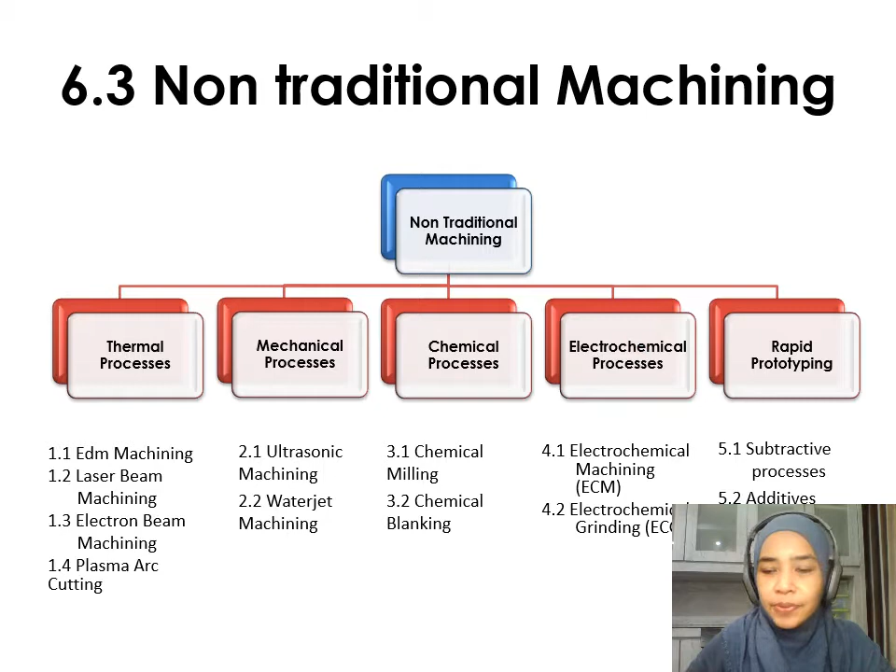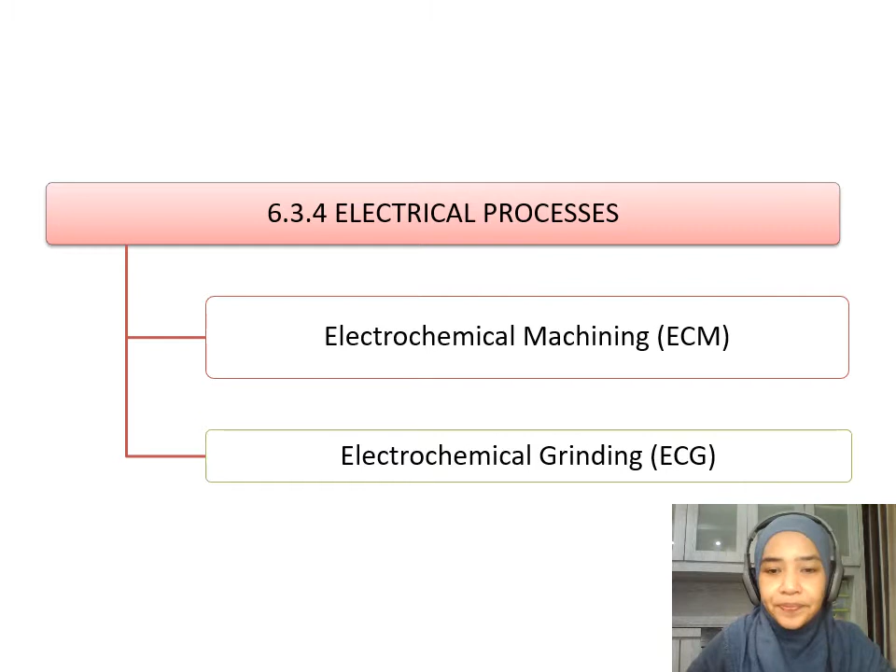So here is the learning objective of the electrical processes. We're gonna discuss about electrochemical machining (ECM) and also electrochemical grinding (ECG). So what is ECM? What is electrochemical process ni?

Electrochemical process merupakan satu proses yang akan melibatkan electrolytic reaction at the workpiece surface yang bertanggungjawab untuk remove the material. Dua metod yang biasa adalah electrochemical machining and electrochemical grinding.

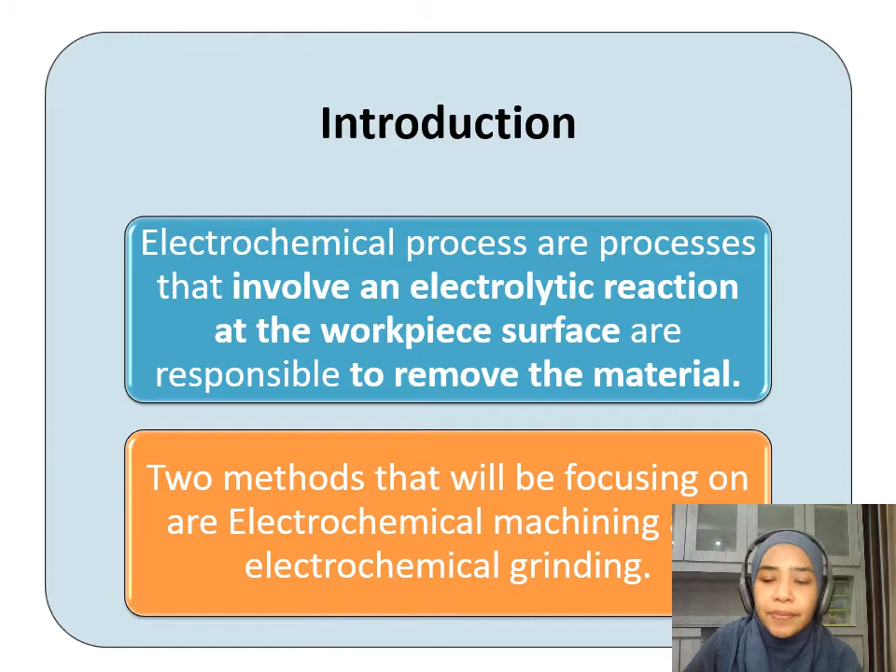So obviously kalau kita tengok dari segi electrochemical ni, dia akan menggunakan electroplating punya reverse lah. So ECM remove metal from the electrically conductive material ataupun conductive workpiece. So syarat dia mesti workpiece yang hendak dipotong itu bersifat konduktif, pengalir. Dan bagaimana workpiece tadi dapat disingkirkan by the anodic dissolution with rapidly flowing electrolyte.

So dia menggunakan electrolyte sekali. Kita akan tengok bagaimana combination of the workpiece dan electrolyte tadi berfungsi dalam menyingkirkan material. Electrolyte pula bertindak sebagai current carrier, sama seperti EDM tadi, di mana kita ada dielectric fluid yang digunakan sebagai pelengkap litar. And the high rate of the electrolyte movement in the tool workpiece gap washes metal ions from the workpiece.

Workpiece kita bersifat anode, okay, positif. Meanwhile kita punya tool bersifat cathode, negatif.

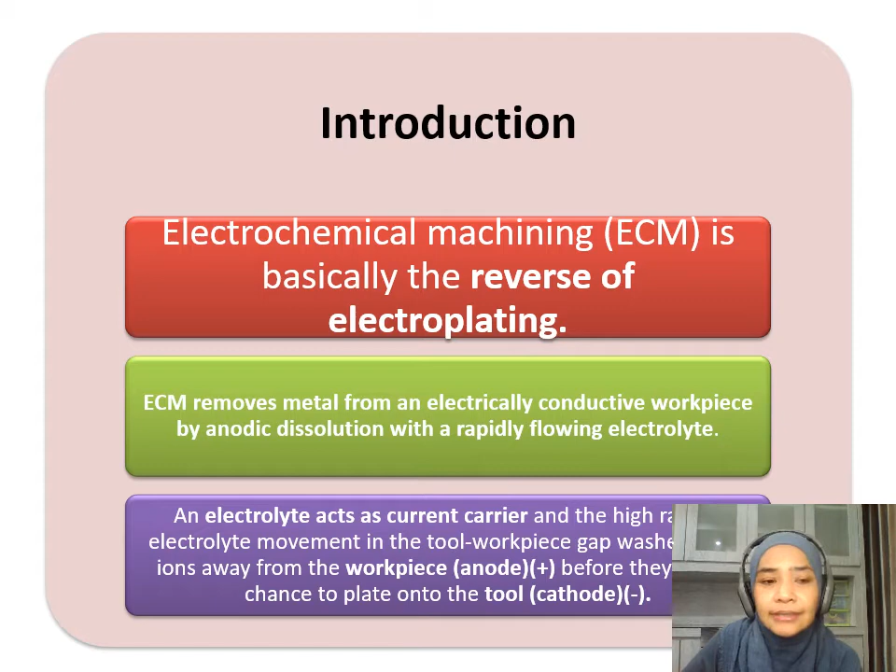From here, you can see the principle of operation. This is the bahagian kita nak potong. The workpiece is over here, dan kalau kita tengok yang warna hitam ni, the black color is kita punya insulation. And this is a tool, yang berada atas insulator ni adalah tool kita, which is cathode bersifat negatif, ion negatif. Dan kita punya workpiece ni adalah anode bersifat positif, ion positif.

So at the same time, look at here. The part over here and the filter, this is the electrolyte yang akan mengalir. Kalau kita tengok kat sini, obviously the electrolyte ini yang mengalir between the gap over here, gap between the tool and the workpiece, bertindak sebagai pelengkap kepada litar yang ada dalam sistem electrochemical machining ni.

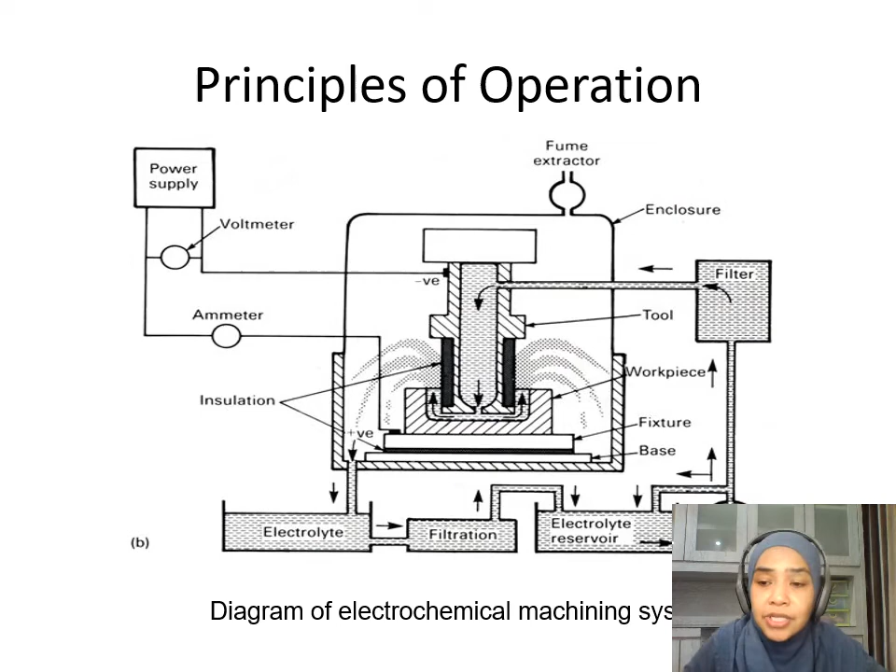So kalau tengok kat sini, the electrolyte yang terkumpul ni masuk sini, akan mengalami filtration. Lepas filter, dia masuk dalam reservoir, tangki dia, sebelum di pump masuk ke dalam filter untuk masuk semula kepada kawasan pemotongan. This is how the cycle of the electrolyte dalam sistem electrochemical machining ni berfungsi.

Dari segi gambar macam ini pula, lebih kepada focusing on the machining area. Warna hijau ni kita punya workpiece, meanwhile warna kuning ini is kita punya tool, bersifat negatif, cathode.

Sebab kita tak nak tool kita haus, kita letak insulator, supaya kawasan sini tidak akan ada direct contact dengan tool kat sini. Sebab kalau yang ni open, dia akan makan potong kat sini juga, dan bentuknya akan lari. Jadi kita letak insulator untuk kita block dia potong bahagian yang tidak sepatutnya.

Warna biru ni adalah electrolyte kita, as a current carrier, also pelengkap kepada litar yang ada dekat sini. Over here you can see the electrolyte flow and return back to the machine, keluar mengalir kat sini, and from the filter masuk balik, pump masuk balik ke sini.

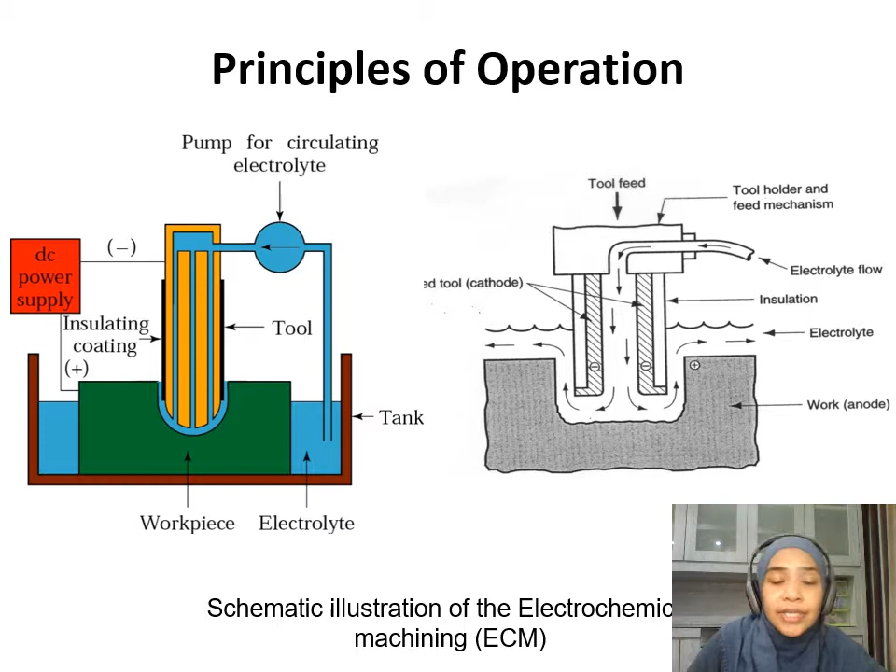Okay, so actually apa yang berlaku sebenarnya ni? Ni adalah example of the combination of tool and the workpiece. Sebenarnya bentuk pemotongan, shape yang akan terhasil pada workpiece kita adalah mengikut kepada shape of cathode tool kita. Cathode tool bentuk ni, bentuk macam gini, so shape yang akan dipotong macam gini juga.

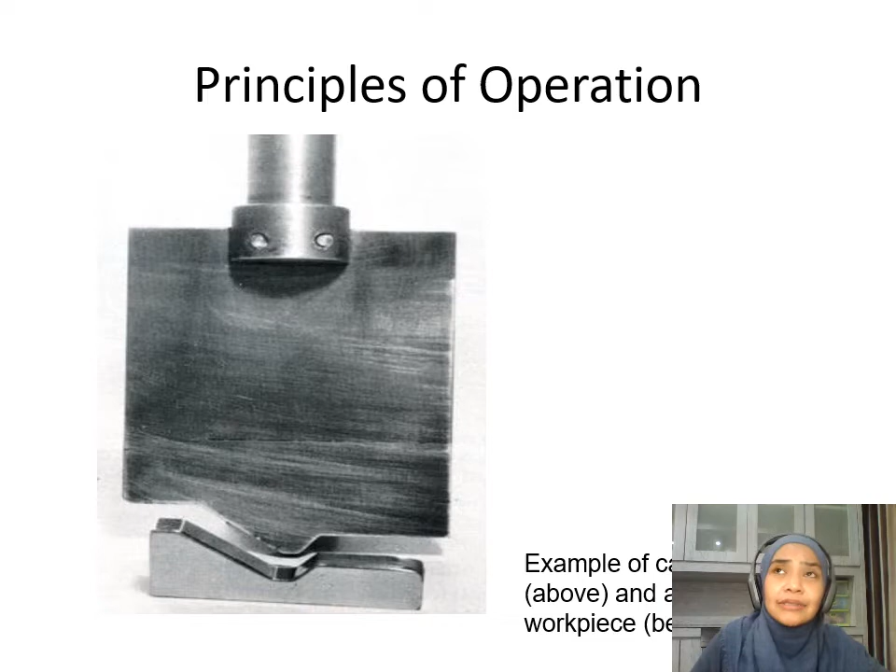So actually workpiece kita akan replicate exactly apa yang ada pada tool kita. Tak kisahlah dalam USM ke, dalam die-sinking EDM ke, dalam electrochemical machining pun macam itu juga. So the principle underlying the process is that the material depletes keluar from the anode and deposited onto the cathode, dia akan melekat pada cathode kita.

In the presence of the electrolyte bath. The difference in ECM is that the electrolyte bath flow rapidly between the pole, antara ion positive and ion negative tadi. Ion positive adalah workpiece kita, ion negative adalah tool kita. Jadi dia tak sempat melekat pada tool kita.

Jadi instead of material tadi, dalam electroplating bahagian positif dia disingkir keluar, so dia akan melekat pada bahagian negatif ni, I mean bahagian cathode. Biasanya dalam electroplating punya konsep ni, material yang disingkirkan daripada workpiece akan melekat pada cathode, which is kita punya electrode.

Tetapi because of the flow of the electrolyte bath ini sangat laju, dia tak sempat nak melekat. Maksudnya material disingkirkan daripada workpiece, sepatutnya melekat pada cathode tadi, tapi tidak melekat disebabkan oleh stream of the electrolyte. So dia akan carry off the material sebelum dia sempat melekat pada cathode, which is kita punya tool.

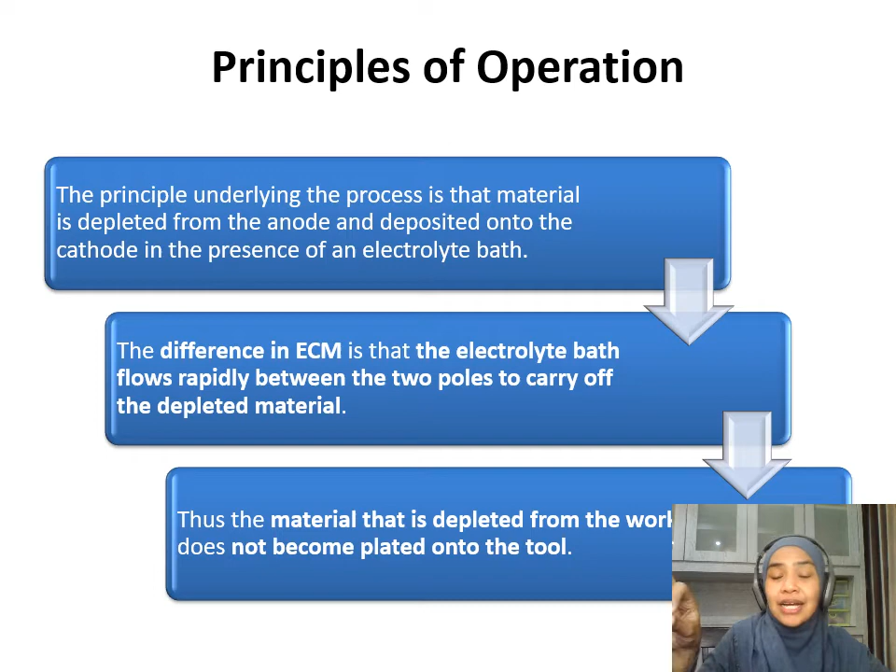Thus the material that is depleted from the workpiece does not become plated. Maksudnya dia yang sepatutnya selepas disingkir keluar daripada workpiece patutnya melekat pada cathode, tetapi because of the stream of the electrolyte tadi menyebabkan dia tak sempat melekat, dan akhirnya disingkirkan daripada kawasan pemesinan. Kalau tak, nanti tool awak akan jadi semakin besar because of the plated material yang depleted from the workpiece.

Biasanya electrolyte ni bersifat konduktif, inorganic solution seperti sodium chloride yang dicampur dengan air atau sodium nitrate. It was pumped dekat laluan di antara tool and the workpiece tadi dengan high rate. And also electrolyte akan bertindak sebagai current carrier, pembawa arus.

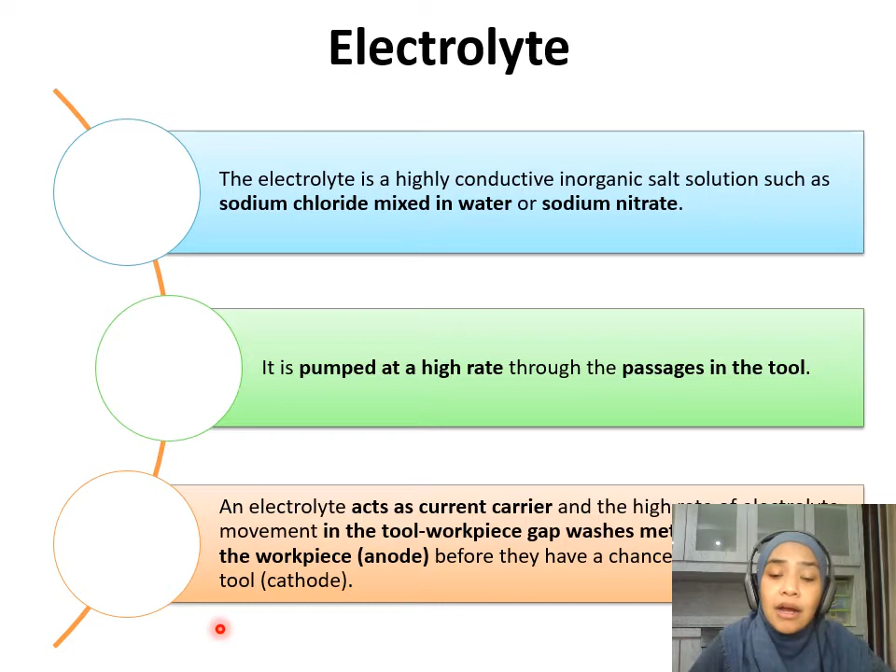The high rate of the electrolyte movement, pergerakan yang sangat laju tadi, akan wash away ions sebelum dia sempat plated pada tool, ataupun cathode.

So the function of electrolyte, selain daripada carries away the heat, carries away the ions, remove products from the reaction before plated on the tool, it's help the machine reaction necessary for the anodic dissolution to take place, and complete the electrical circuit. That was the function of the electrolyte in the electrochemical machining.

And required characteristic, ciri-ciri yang perlu ada pada electrolyte: high electrical conductor to reduce the power loss, machine at a high current efficiency for good surface finish, non-toxic and safe for use, and non-corrosive.

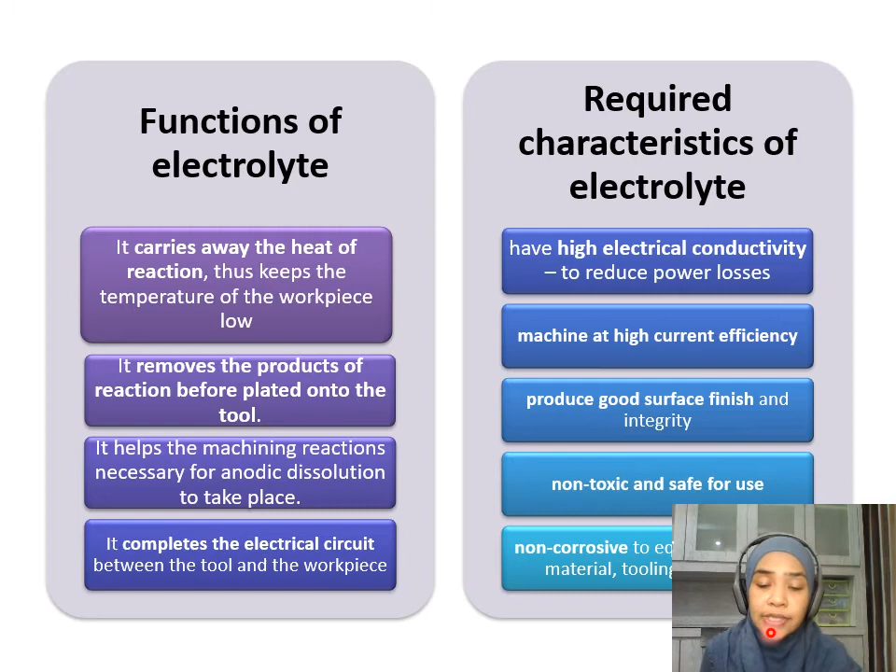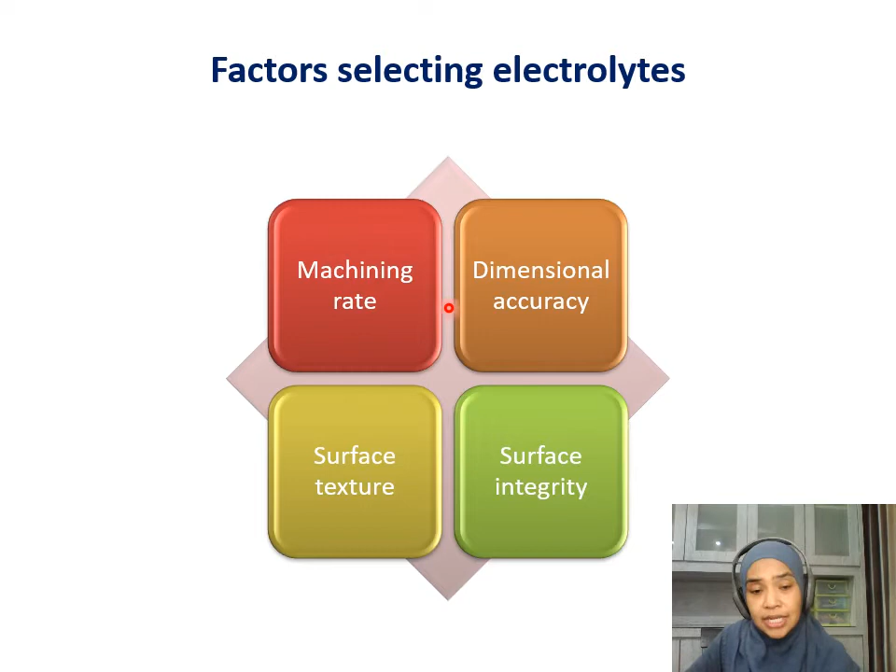The factors need to be considered while selecting the electrolyte adalah machining rate, dimensional accuracy, surface texture and surface integrity. So this is dari segi required characteristic of electrolyte.

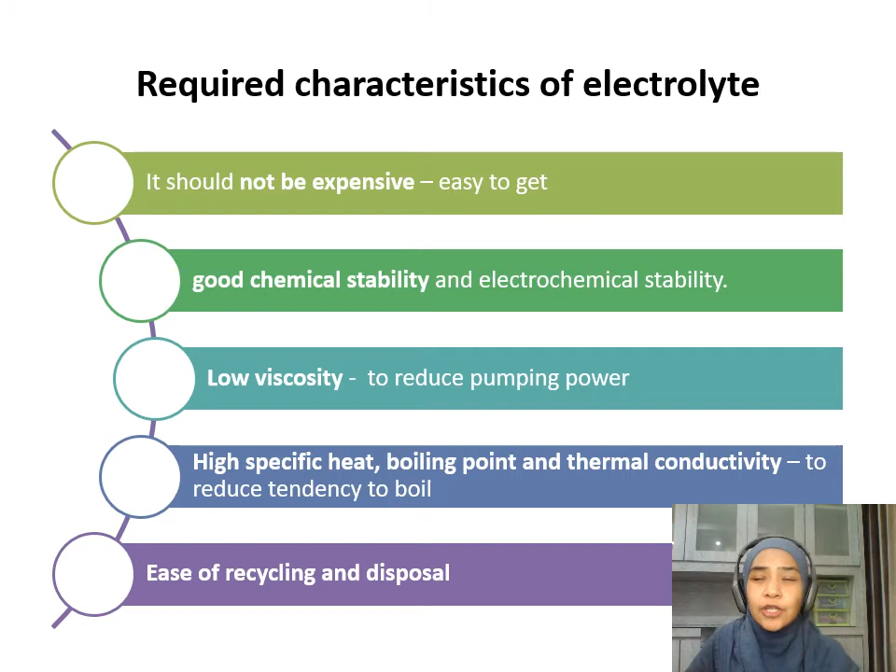It should not be expensive, easy to get, good chemical stability dan electrochemical stability, low viscosity, tak pekat sangat, sehingga menyusahkan pumping of power tu. So high specific heat, boiling point and thermal conductivity will reduce the tendency to boil, ease of recycling and disposal - senang untuk dilupuskan, senang juga untuk di-recycle.

Dalam kita ambil tool pula as cathode, negatif, so dia mestilah bersifat konduktif and resistant. Senang untuk kita machine because the tool is important untuk kita replicate, maksudnya bentuk yang kita nak hasilkan pada workpiece. Kalau tool tadi susah untuk machine, nanti hasil kerja pada workpiece pun tak cantik, sebab workpiece kita akan replicate exactly bentuk tool kita.

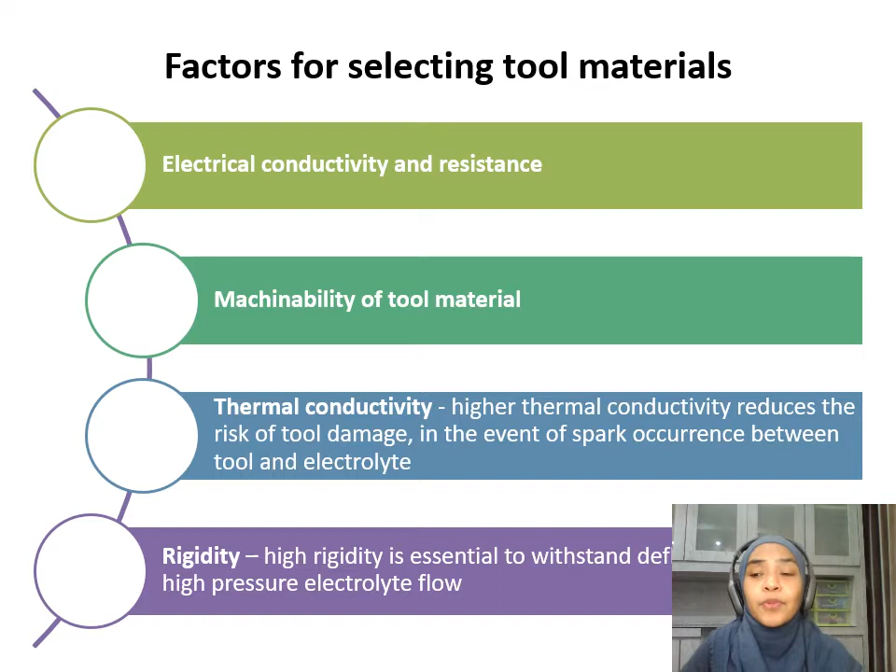Thermal conductivity - higher conductivity reduce the risk of tool damage in the event of spark occurrence between the tool and the electrolyte. Rigidity, dia kuat, dia kukuh - high rigidity is essential to withstand the deflection due to the high pressure electrolyte flow. Bila dia ada aliran yang sangat tinggi, dia tak mau benda tu boleh bergerak, sebab bila dia deflect, dia akan mengganggu bentuk yang bakal dihasilkan kepada workpiece nanti.

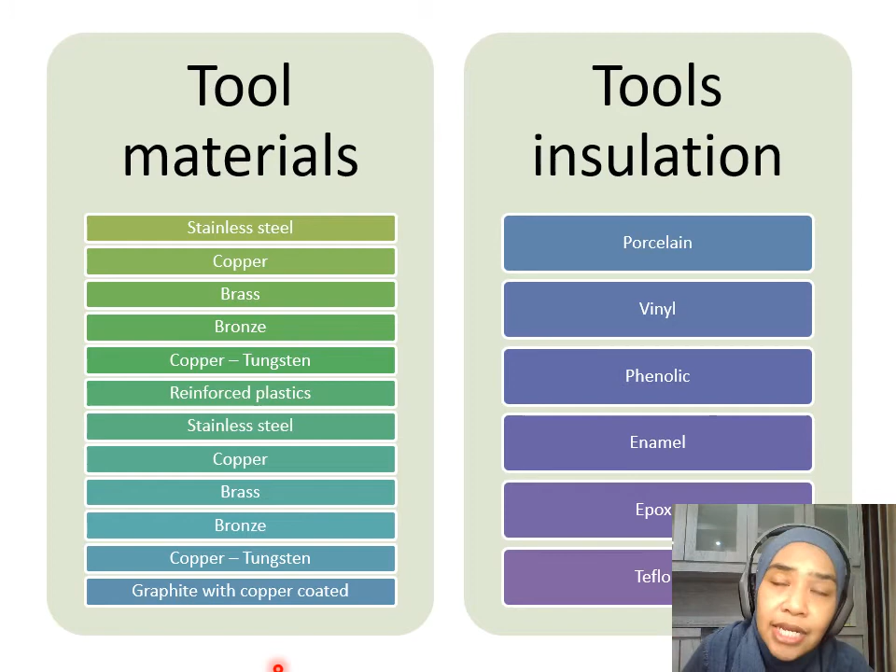Dari segi material to material, this is the list of the tool materials can be machined using the electrochemical machining. This is the insulator yang boleh digunakan untuk cover tool, cover cathode - porcelain, vinyl, phenolic, enamel, epoxy, teflon. So mostly daripada ceramik dan juga polymer.

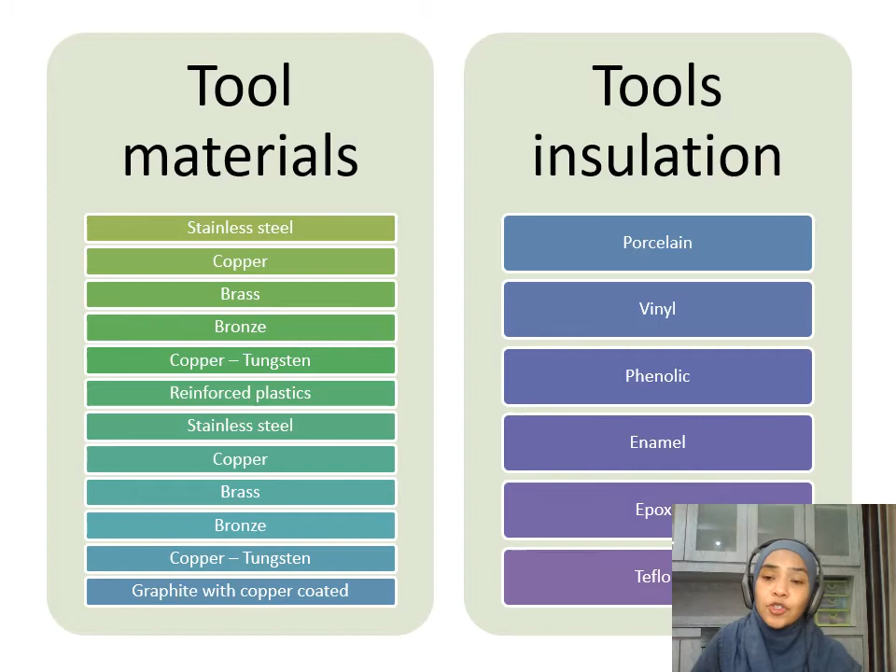Dari segi tool feed, because the tool does not wear in the ECM, so a servo controller is not required to maintain a certain gap - tak perlu sampai too critical untuk memastikan gap tu terlampau crucial. However, the tool needs to be fed at a constant rate. Walaupun tidak perlu dikawal terlalu crucial, kita perlu pastikan constant rate, otherwise the gap distance will be increased. Kalau kita biar dia bertambah, pembersihan tu mungkin akan terganggu. And the feed rate juga bergantung kepada sejauh mana pembersihan yang berlaku pada ketika itu.

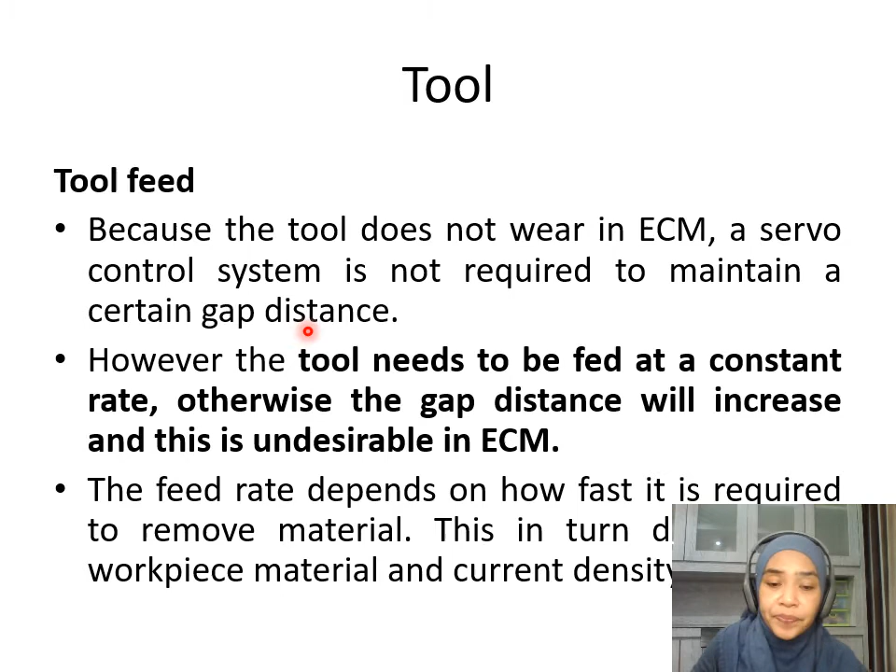Feed rate is very slow, is very low but needs to be very smooth. Okay, tak boleh laju. Okay, but somehow smooth, tak boleh dijerking dan sebagainya. The sliding movement of tool can be controlled using the hydraulic cylinder which allow unlimited choice of the feed rate.

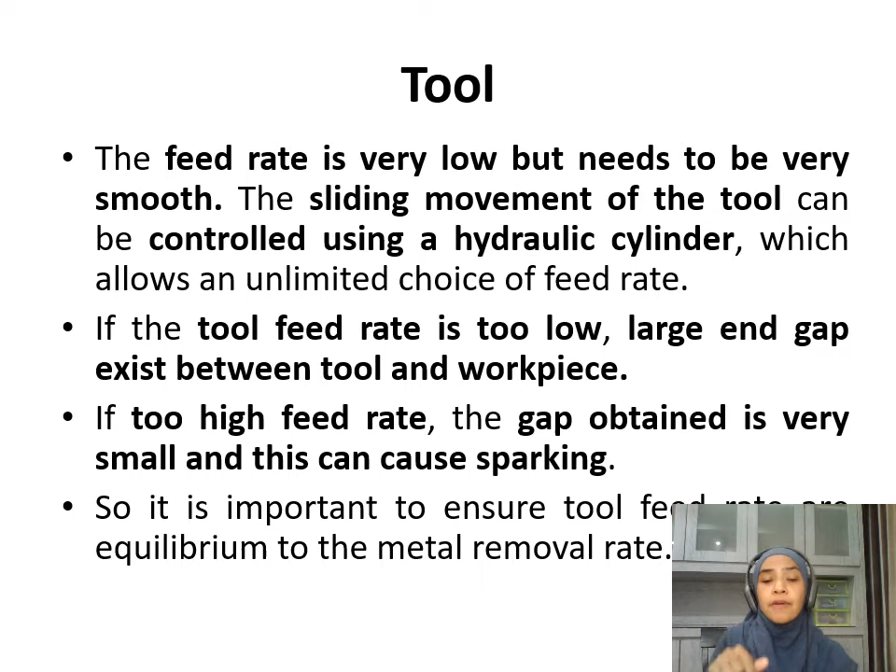So it's important to make sure that the feed rate of the tool tu berlaku pada keadaan yang seimbang dengan kita punya MRR ataupun material removal rate. And biasanya kecacatan yang berlaku dalam ECM ni adalah cavitation. Cavity ni macam kita kata lubang-lubang lah, yang terhasil berlakunya tool damage, surface finish, irregular work surface, striation.

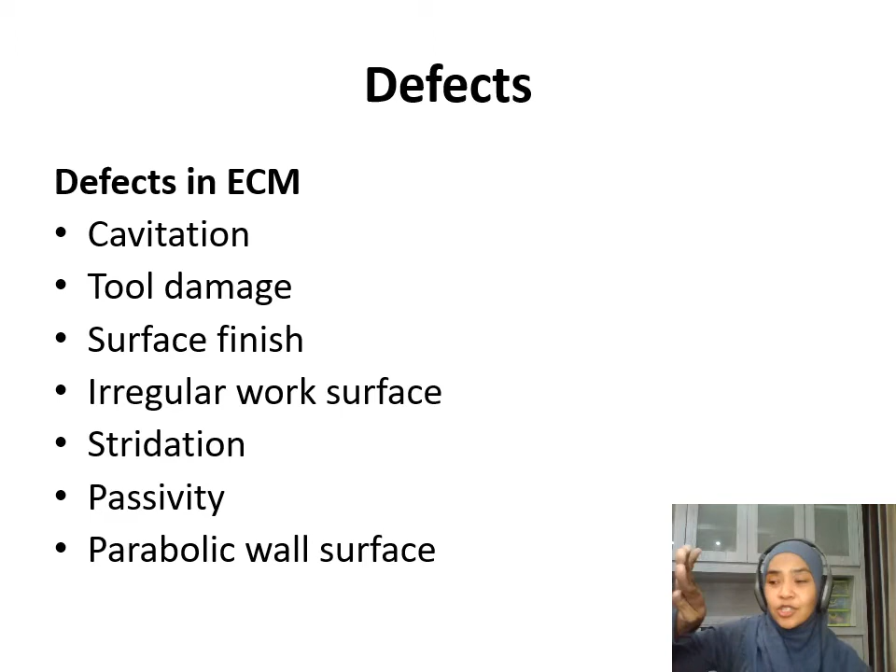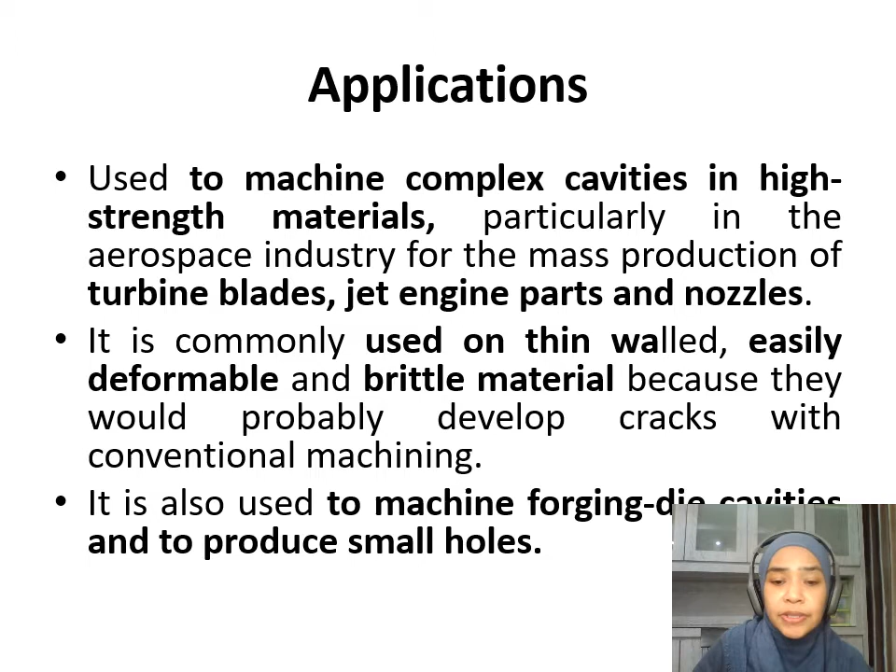Dari segi application, used to machine complex cavity in high strength material, such as in the turbine blades, engine parts and nozzle, used in the thin wall, easily deformable and brittle material, and to machine forging die cavities and produce small hole. This is the example of the product from the electrochemical machining.

Dari segi kelebihan dia, look at here, machine efficiently, complicated configuration can be obtained. Actually saya boleh conclude dalam semua part machined by the NTM, non-traditional machine, it can machine complicated configurations. I mean that complicated, complex ataupun intricate shape. Tak ada masalah, sebab tu dia diwujudkan. Apa yang tak boleh di machine dekat kita punya machining can be machined here.

There is no tool wear. There is no thermal damage. The residual compressive stress is very small. Can carry out finishing machining operation. A satisfactory level of surface roughness can be obtained. Maksudnya dari segi dia punya roughness tu acceptable lah, memuaskan lah.

Namun dari segi disadvantages atau limitation of this process is only metal, because they need to be conductive metal. And also require energy consumption yang tinggi. Surface finish not very fine, acceptable tapi taklah terlampau halus. MRR dia, material removal dia agak perlahan. Boleh menyebabkan karat di kemudian hari nanti. Corrosion of the part is serious drawback.

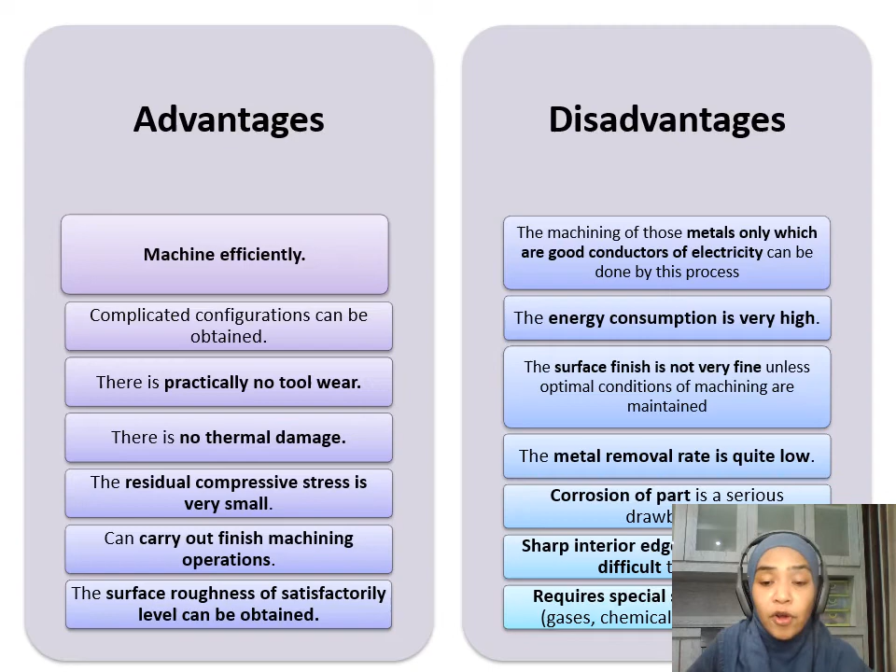Sharp interior edge and corner are difficult to make, and also kita kena ada safety provisions such as gases, chemical and high current, because it involves all the gases, chemical and high current. This is the list of the question can be answered. You can test yourself by answering the question.

Next, we're going to discuss about the electrochemical grinding. So yang membezakan electrochemical grinding and electrochemical machining adalah use abrasive particle. Grinding carbides and high strength temperature resistant, HSTR alloys, hard to machine alloys, etc. with the diamond wheel is very costly because of the high cost of the abrasive.

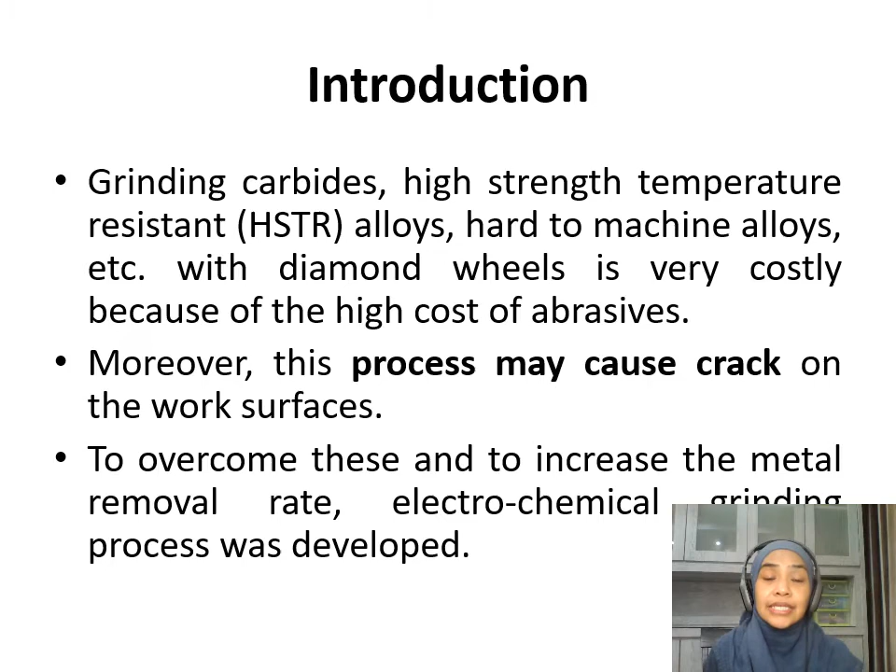In the electrochemical grinding process atau ECG is actually the improvised version of the ECM tadi. So ECM tak guna abrasive particle, yang ni dia guna abrasive particle, dalam bentuk conventional grinding lah. The equipment used is similar to the conventional grinder. So kita ada grinder wheel over there.

Cuma kalau dalam abrasive machining, the grinder wheel tu akan touch kita punya workpiece. This one is not touched at all. There is no touching at all between the wheel and the workpiece. The wheel is metal bonded. Kita ada vitrified, metal, resinoid. So kita guna metal bonded with the diamond or aluminium oxide.

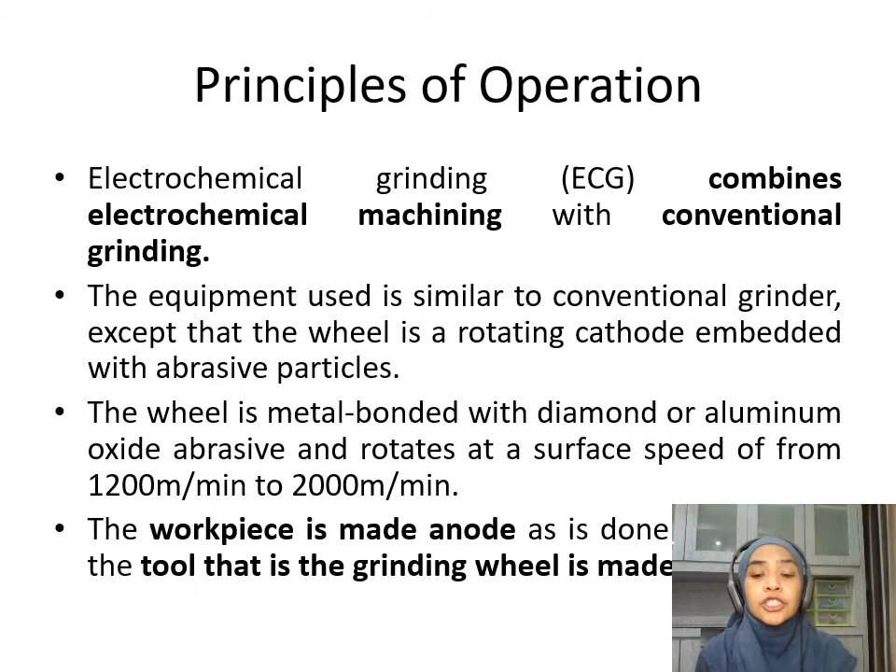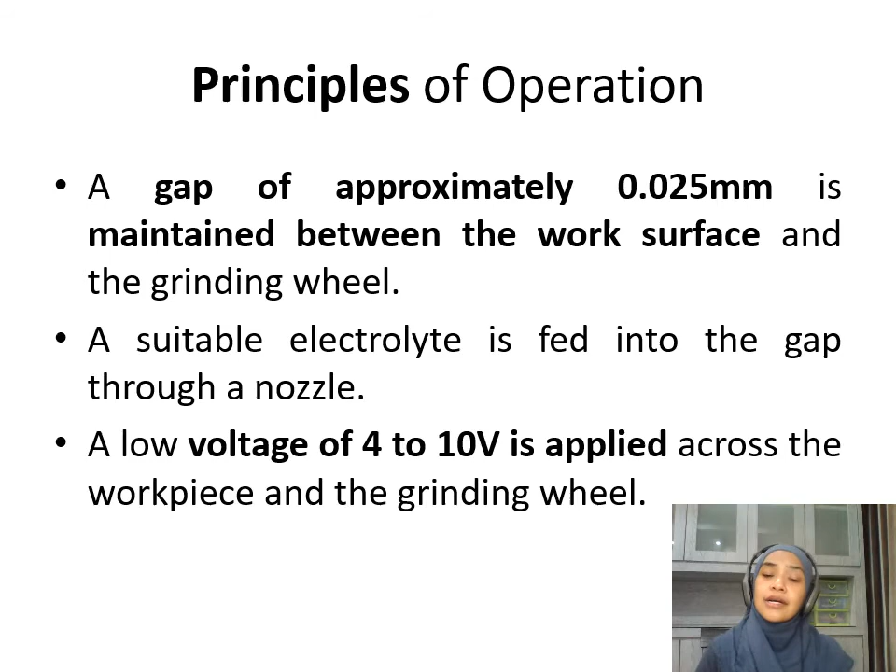And rotate pada speed 1200 meter per minute hingga 2000 meter per minute. Workpiece as anode, maksudnya positif. Meanwhile the tool, kita punya grinder as a cathode. Dari segi gap, we maintain about 0.025 mm between the anode and the cathode. Electrolyte will be fed into the gap, and the voltage applied daripada 4 hingga 10 volts.

As a principle of operation, high density current passes to the electrode. The abrasive particles of the grinding wheel are non-conductors of electricity. Therefore, they are bonded among themselves and to the wheel metallically to help complete the electrical circuit.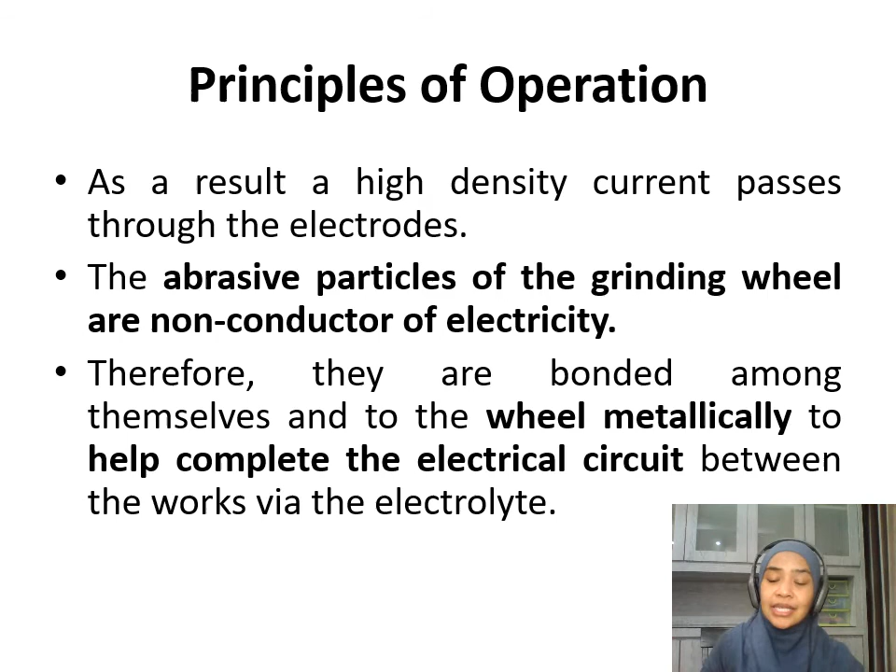Okay, so over here the whole system forms an electrolytic cell. Electrolytic dissolution of the work material takes place and material removal from the workpiece is effected. Material removal happens in two ways. One is by anodic dissolution, because it is electrochemical, so the material of the workpiece, which acts as the anode, is removed.

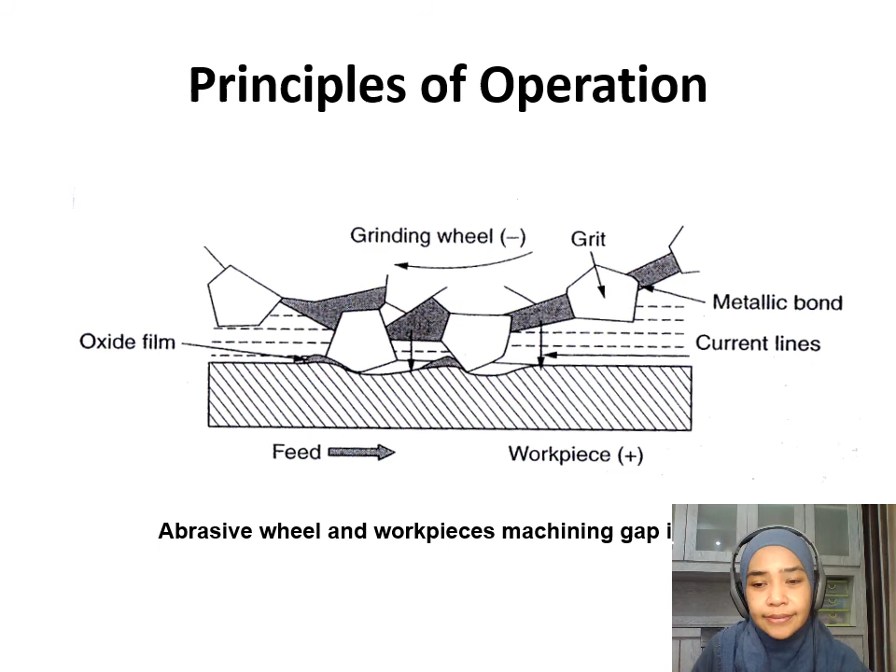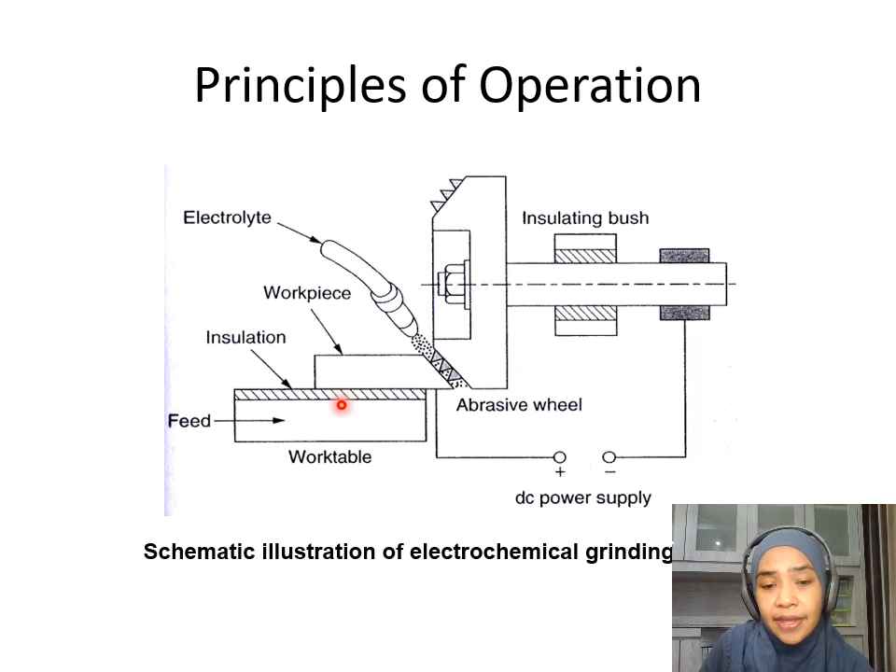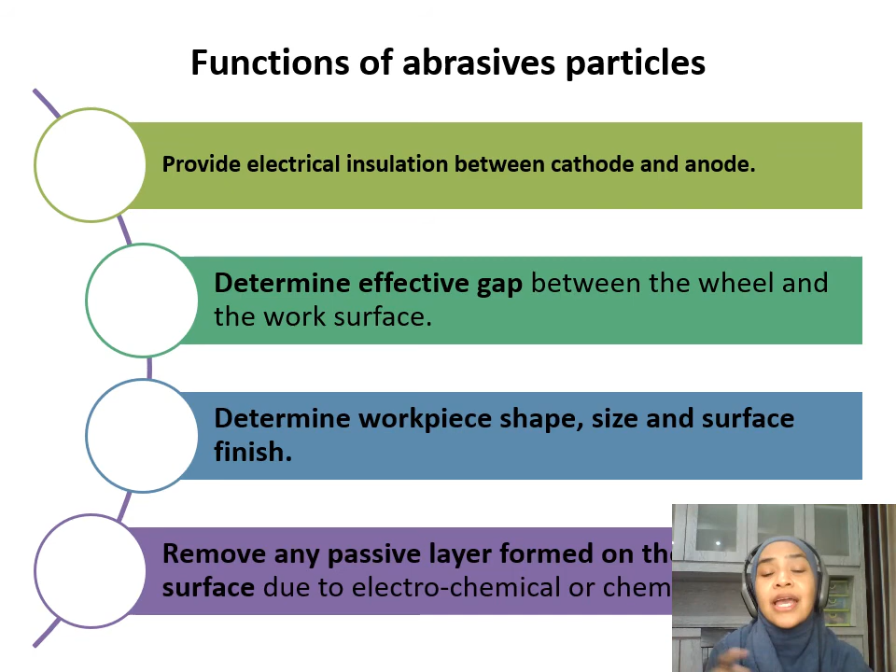Okay, so what is the function of the abrasive particles here? They provide electrical insulation between the cathode and the anode, and are also used to determine the effective gap between the wheel and the work surface, determine the workpiece shape, size and surface finish, and remove any passivating film formed due to the electrochemical or chemical reaction.

Okay, the use of ECG: grinding carbide cutting tools, for example inserts for face milling. Effective for fragile parts, such as honeycomb, thin tubes, hypodermic needles, which can be made using ECG. Higher production rate achievable while grinding hard, tough, stringy, work-hardenable, heat sensitive materials.

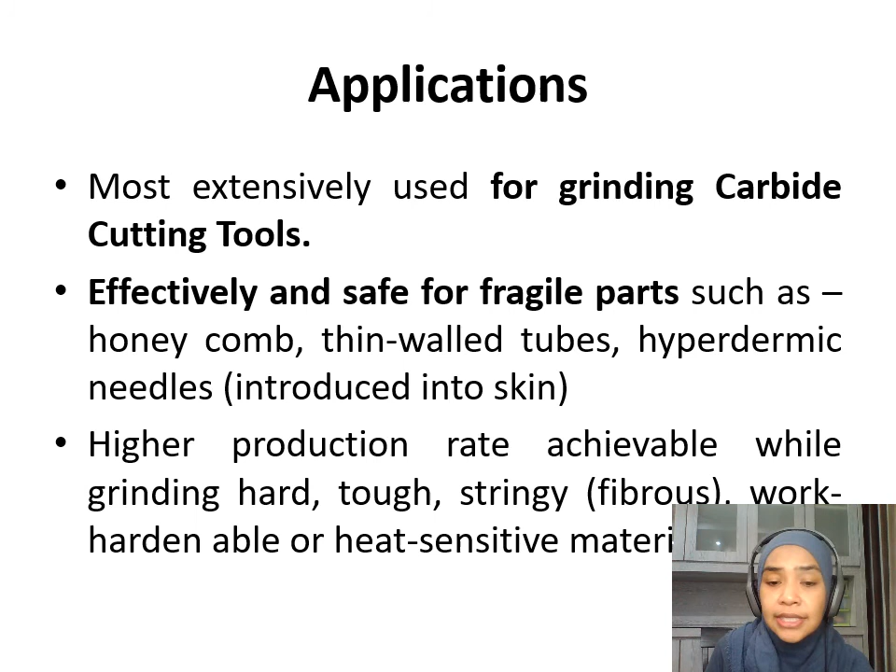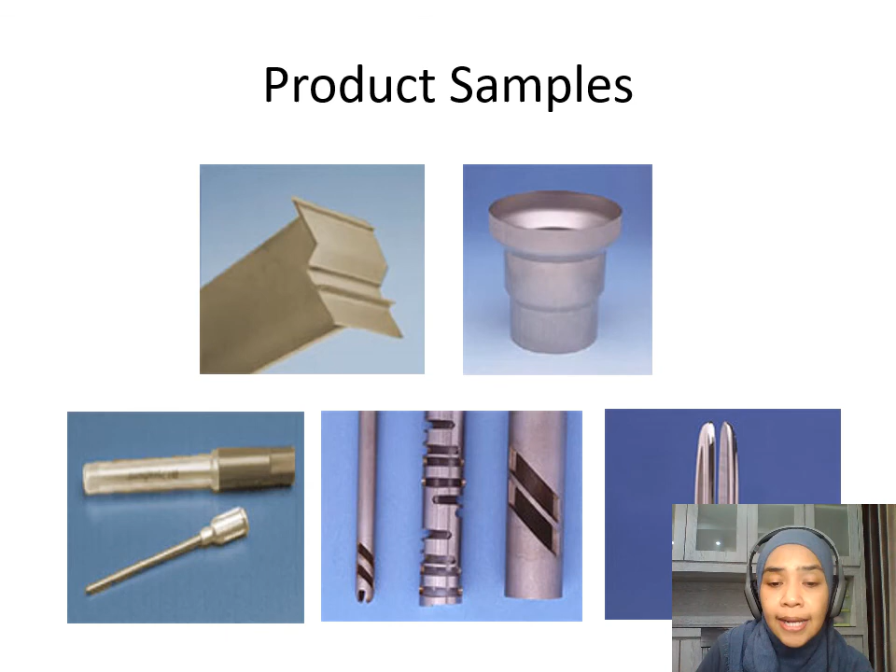And here are the product samples. So this is the needle. This is a part that can be machined using ECG. This is the needle. It has some advantages.